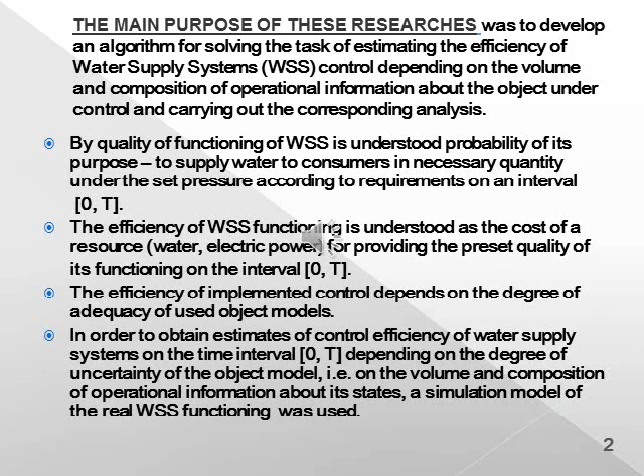The main research results of this work are: the efficiency of implemented control depends on the degree of adequacy of used models of the object. We introduce criteria characterizing the degree of closeness of obtained solutions when using different types of models of control objects. The algorithm of estimation of quality and efficiency of water supply systems control, depending on the volume and composition of operating information about the object under control, is presented.

Carried out research have shown that for maintenance of optimum values of criteria of quality and efficiency of water supply systems functioning on a control interval, it is enough to have pressure measurements in all local dictating points of a network. Further increase in number of measurements does not lead to improvement of these criteria values. Research was carried out with the use of the simulation modeling method of real water supply system functioning.

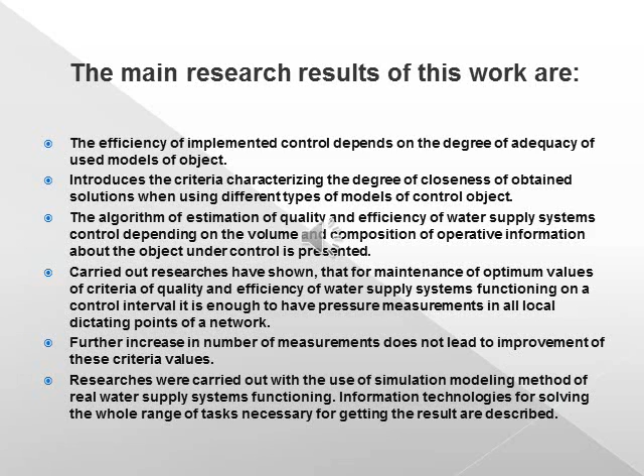The next slide presents the conceptual scheme of information technology to support operation control in water supply systems. The process of operational control of water supply systems is divided into two stages: operational planning of modes of functioning of the water supply system, and their stabilization.

The solution to the problem of operational control of the functioning of water supply systems is achieved by decomposing the original problem into a number of hierarchically related tasks. Consider the structure of solution problems of operational control of the functioning of water supply system, slide 4.

Based on the operational information, getting simultaneous data from sensors installed at controlled points in the network, the task of identification of the state of the flow distribution in the water supply system is solved.

The multiple solution of this task allows us to determine, for each node of the water supply system model, the vector of evaluated water consumptions, which is then used as a series to predict the water consumption of each of these nodes for the entire control interval.

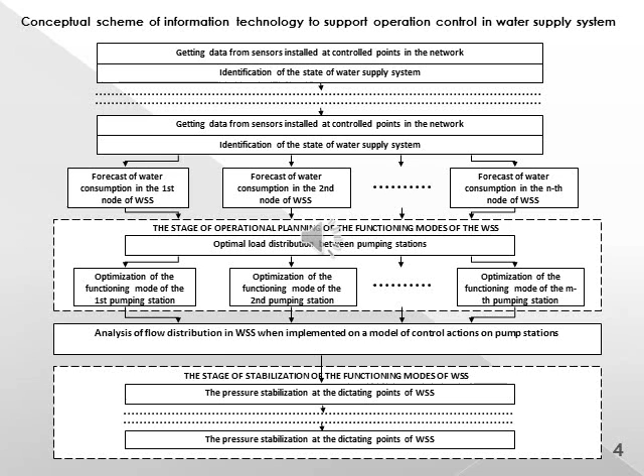To ensure the obtained parameters of water supply system outputs as a result of solving for all k equal 1 to k big, the task of optimization of the pump station operating mode for all of them determines the optimal structure and parameters of its functioning.

The described sequence of solving the operational planning problem makes it possible to obtain a solution that is invariant with respect to the predicted level of stochastic disturbances, which guarantees the necessary quality of water supply system operation over the entire control interval at maximum efficiency.

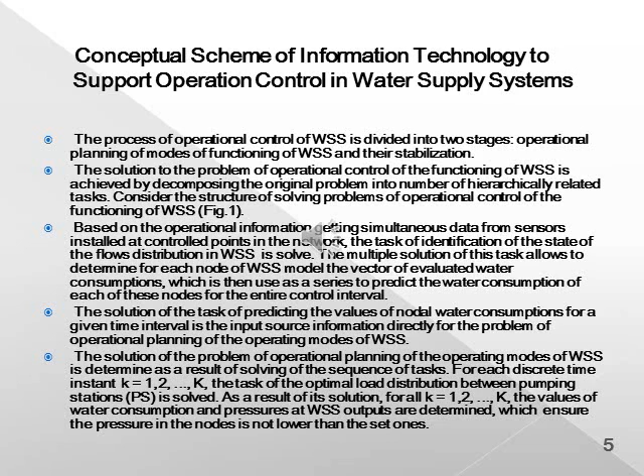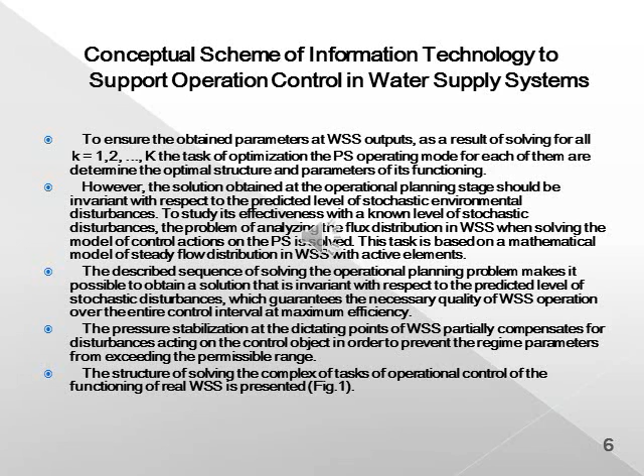The pressure stabilization at the dictating points of the water supply system partially compensates for disturbances acting on the control object in order to prevent the regime parameters from exceeding the permissible range.

Research results. Let's denote L the set of pump stations of the water supply system, M the set of trunk sites of the water supply system, N the set of nodes of a network with consumers, HI, QI the pressure loss and the expense in the i-th site of the water supply system, H input, Q input, H output, Q output the pressure and the expense on the input and the output of the i-th pump station. Let us introduce the criteria characterizing the degree of closeness of the obtained solutions when using different types of water supply system model.

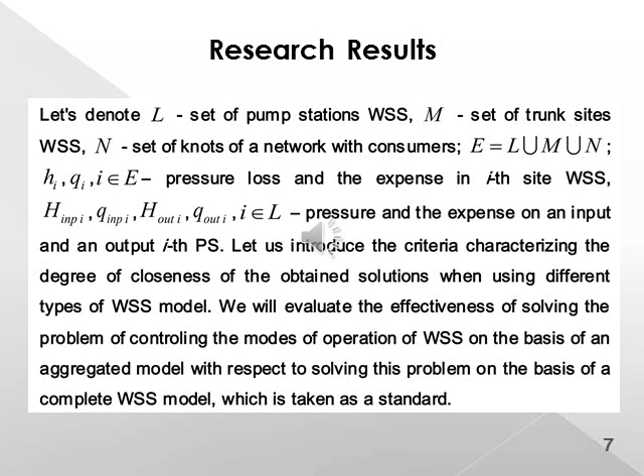We will evaluate the effectiveness of solving the problem of controlling the modes of operation of the water supply system on the basis of an aggregated model with respect to solving this problem on the basis of a complete water supply system model, which is taken as a standard.

On set L of all water supply system inputs, we will introduce a measure characterizing the degree of closeness of the values of the variables determining their states when solving on the basis of an aggregated and complete water supply system model, Formula 1. Since the variables H output, Q output are measured in different units, the use of measure 1 makes it possible to bring disparate scales to a single dimensionless one.

In addition, let us introduce a measure characterizing the maximum deviation on the variables Q output, H output that determine the states of the water supply system inputs from their optimal values Q output star, H output star. Formulas 2 and 3.

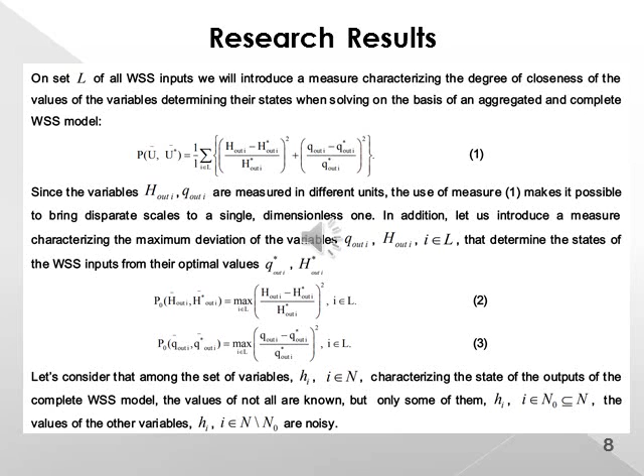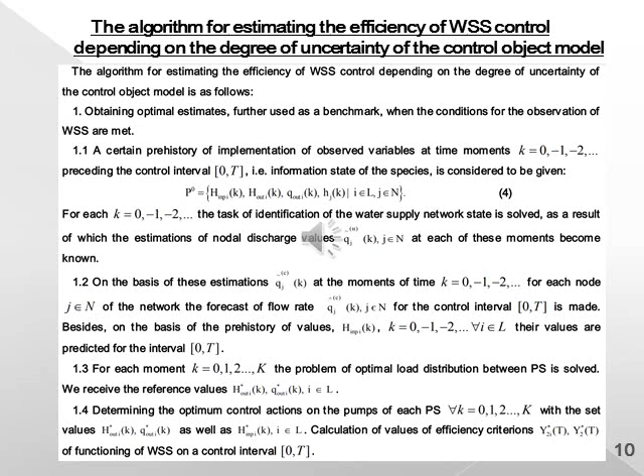The following slides present the algorithm for estimating the efficiency of water supply system control depending on the degree of uncertainty of the control object model. The algorithm is described in detail on slides 10, 11, 12, but in the limited time I will not have time to read all points.

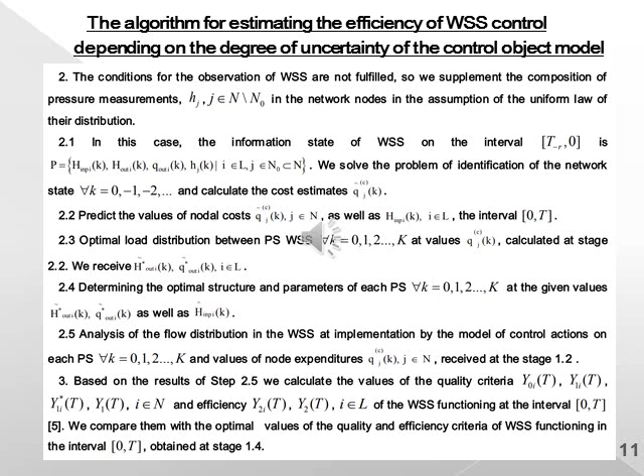Analyzing thus a different number and composition of observed variables h_j(k), k equal 0, -1, -2, we will receive estimations of quality criteria and efficiency of water supply system functioning on a control interval [0, T], and also estimations of criteria 1 to 3 characterizing a degree of closeness of optimum decisions at the corresponding value of an error at the expense of incompleteness of composition of the operating information on an operated object.

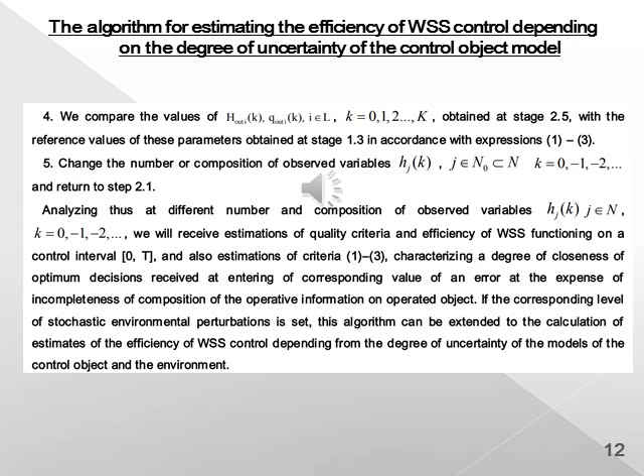If the corresponding level of stochastic environmental perturbations is set, this algorithm can be extended to the calculation of the estimates of the efficiency of water supply system control depending on the degree of uncertainty of the models of the control object and the environment.

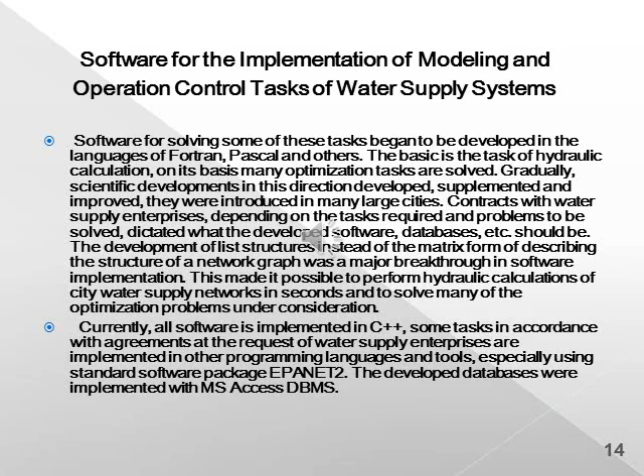Software for implementation of modeling and operation control tasks of water supply systems. Currently, all software is implemented in C++. Some tasks, in accordance with agreements at the request of water supply enterprises, are implemented in other programming languages and tools, especially using the standard software package EPANET2. The developed databases were implemented with MS Access.

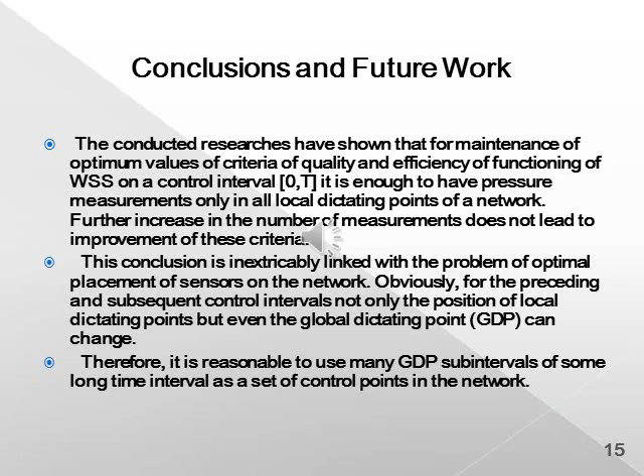Conclusions and future work. The conducted research has shown that for maintenance of optimum values of criteria of quality and efficiency of functioning of the water supply system on a control interval [0, T], it is enough to have pressure measurements only in all local dictating points of a network. Further increase in the number of measurements does not lead to improvement of these criteria.

The use and widespread adoption of information technologies of optimal control operation of water supply systems allows in practice to improve the quality and effectiveness of their functioning by reducing the excess pressure in the networks and consequently reducing unproductive costs of water, reducing electricity costs, reducing the probability of occurrence of emergency situations in networks.